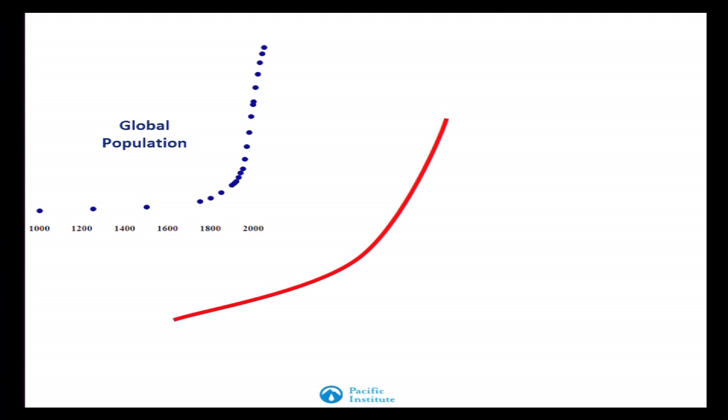Let me talk about the concept of peak water before I come back to this idea of supply. Let me do it in the context of exponential curves that all of us are familiar with. Exponential curves that you all know are frankly behind many of the problems that we face today. Global population, described by an exponential curve. This is the population curve for the last 1,000 years, from 1000 to 2000 AD, showing exponential growth in population. Carbon dioxide in the atmosphere over the last 1,000 years. We heard some talk quite a bit about climate in the first session this morning. Atmospheric concentration of CO2 in the atmosphere over the last 1,000 years.

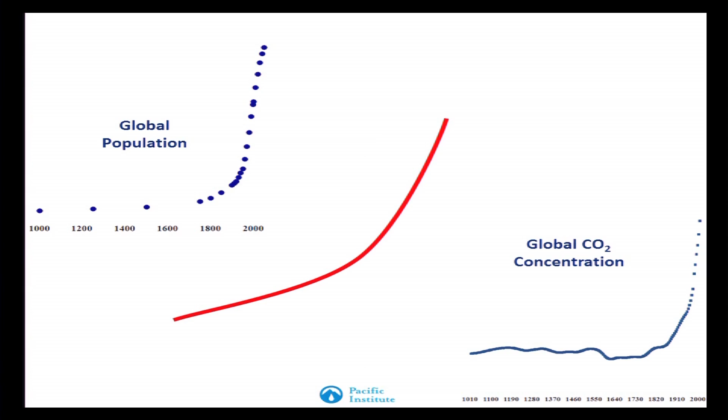Exponential growth is behind many of the problems we face today: exponential growth followed by a peak in something, followed by a decline. We saw lots of curves this morning, and you see this kind of graph in lots of the sciences you deal with.

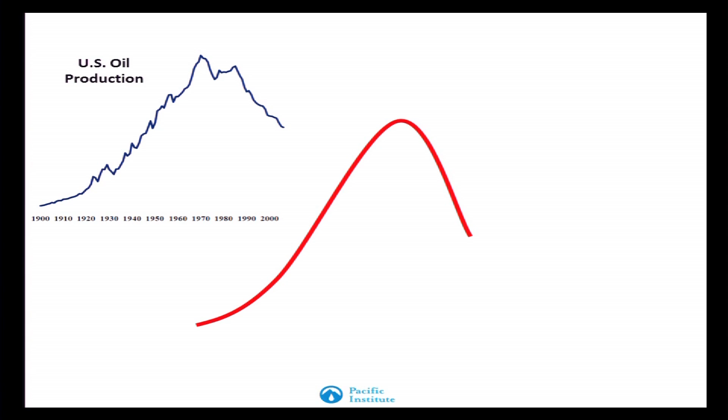We see it with US oil production, and the concept of peak oil is this curve. This is a graph of peak oil production in the United States. Oil production in the US peaked in the 1970s, I think 1970, and has declined since then. There's a debate about when the world will reach peak oil. Peak oil doesn't mean we're going to run out of oil - it means it will become more difficult to find or more expensive to produce, and alternatives will become cheaper while production declines. But exponential growth in something, a peak, and then a decline follows this classic shape.

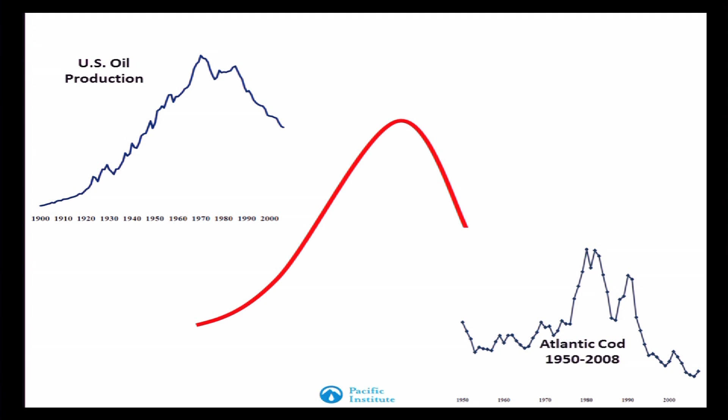Atlantic cod - again you can't read the numbers, but from 1950 to 2010, cod production shows exponential growth in the taking of cod in the Atlantic, followed by a collapse in the cod population and a decline in cod capture. Even to this day, the cod population in the Atlantic hasn't recovered. So demands on resources, peaking in resources, and a collapse or decline follows this kind of curve.

Another comment about peak water - this is in the context of some work I've done with a colleague of mine, Meena Palaniappan, on the concept of peak water.

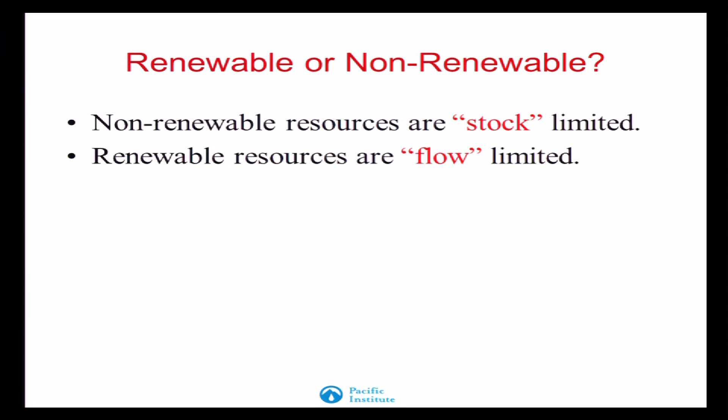Water is a renewable resource, mostly. A renewable resource is typically defined as one that is flow limited. A non-renewable resource like oil is typically defined as stock limited. The difference is that non-renewable resources are limited by the amount that's there - the stock. Once it's gone, it's gone, it's non-renewable. Renewable resources are limited by flow - the amount you use has no effect on the amount you get next year. Think about a river, natural flows, the hydrologic cycle. It doesn't matter if you take water out of the river this year, it doesn't affect how much you get next year. There's natural variability, but you can't take more than the natural flow. So renewable resources are flow limited.

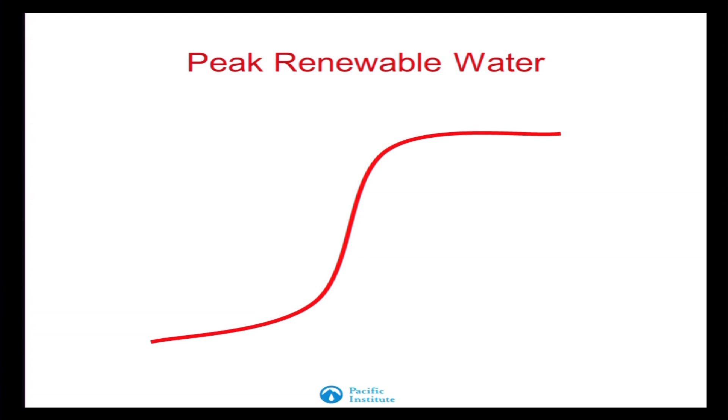Water, interestingly, is mostly renewable, but has some non-renewable characteristics, and in the concept of peak water that's relevant. Peak renewable water looks like this: you start to take water out of a river, your demand grows because demand for industrial or agricultural water use grows, and then you take it all and you can't have any more. Once you take the entire renewable flow of a river, you're constrained - that's peak renewable water.

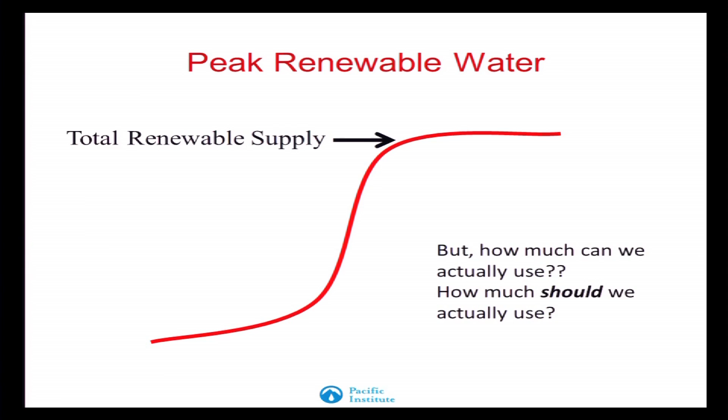We see this on the Colorado River, we see this on lots of rivers. It begs the question: should we take it all? That's an ecosystem question, a societal question, a cultural question - there are lots of issues associated with that. But that's the concept of peak renewable water. And in more and more of our resources, our traditional response to demand for supply - find more water - is running into constraints.

This is the flow of the Colorado River measured at the southern boundary station, basically at the mouth of the delta in Mexico. What it shows, first of all, is lots of natural variability - we have wet years and dry years. It also shows that in the 30s, 40s, 50s, and 60s, the amount of water reaching the delta started to decline.

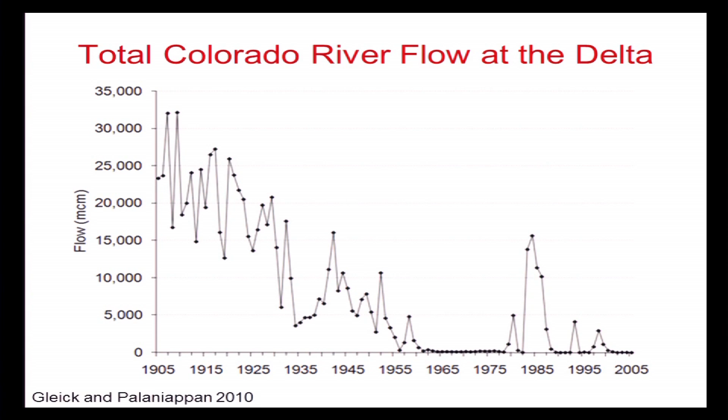And that's because we built the big reservoirs on the Colorado River and we started to take a lot of water out for our cities and our agricultural demands. And what it also shows now is that in average or typical years, no water reaches the Colorado River Delta anymore. We, the 7 states and Mexico, take it all. In really wet years, if the reservoirs are full and you get a wet year, some flow reaches the Delta. But mostly, we've reached peak demand and peak supply on the Colorado River. And this is true on the Yellow River, the Nile, and lots of ecosystems around the world.

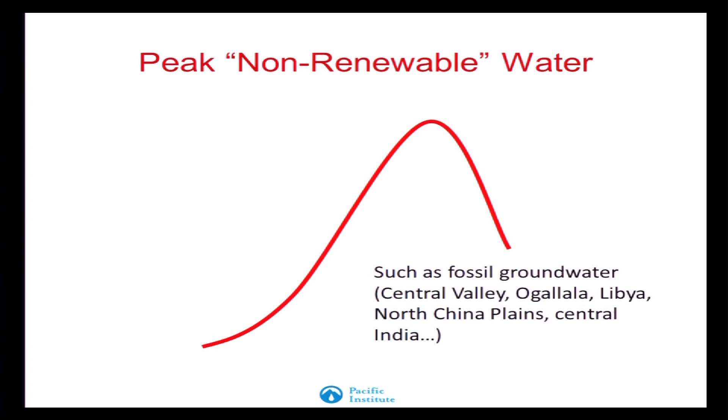Peak non-renewable water looks like this: you take water out of an aquifer, more and more, and the groundwater levels drop. It becomes more expensive to pump, and you run into a peak and start to reduce withdrawals because it's more expensive. Land goes out of production, like in the Ogallala aquifer, and you get a decline. That's peak non-renewable water. A lot of our water use worldwide now is not peak renewable water, but peak non-renewable water—that's another topic for another conversation.

Then there's the concept of peak ecological water, which I won't discuss much except to say it's the idea that we reach a point where the next gallon or cubic meter of water you withdraw causes more ecological and economic harm than benefit. Benefits grow with the amount of water appropriated by humans, until suddenly the next unit of water has negative economic or ecological value—or preferably a combination of both. We're good at measuring economic value, crappy at measuring ecological value, but that's a question for ecological economics. We argue lots of systems around the world are way past the point of peak ecological water, where we're now causing more harm than benefit from the water we take out.

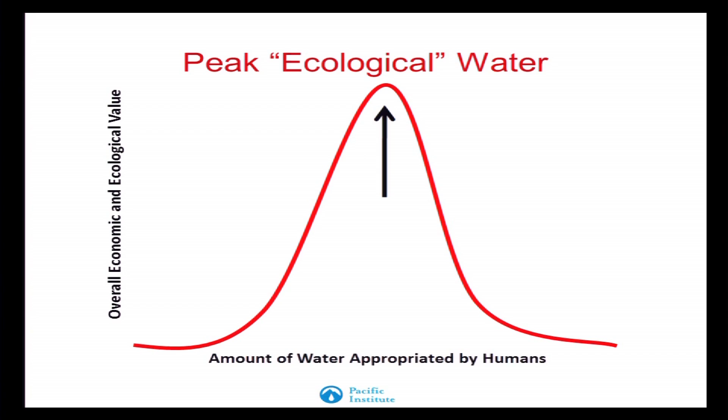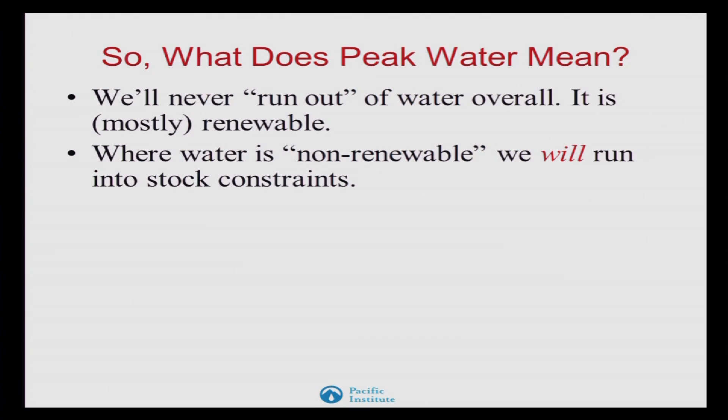So, quick overview: peak water doesn't mean we're going to run out of water. Water is mostly a renewable system. Where it's non-renewable, we're going to run into stock constraints, and there are limits on what we'll be able to do in the future. And we're running up against flow limits in renewable systems—a combination of natural flow constraints and increasingly economic, and I'd argue ecological, constraints. We're hitting peak ecological water in lots of our systems.

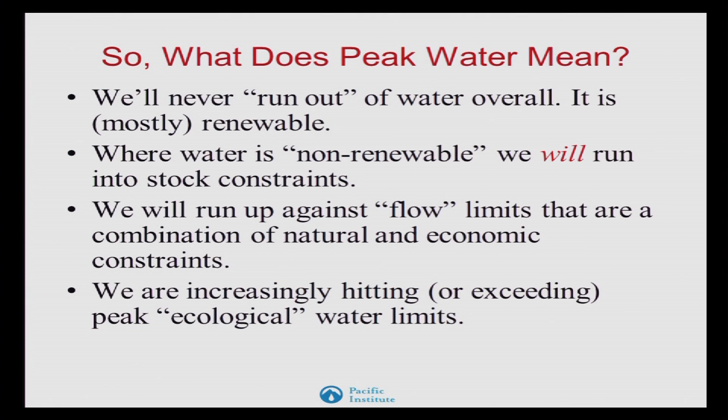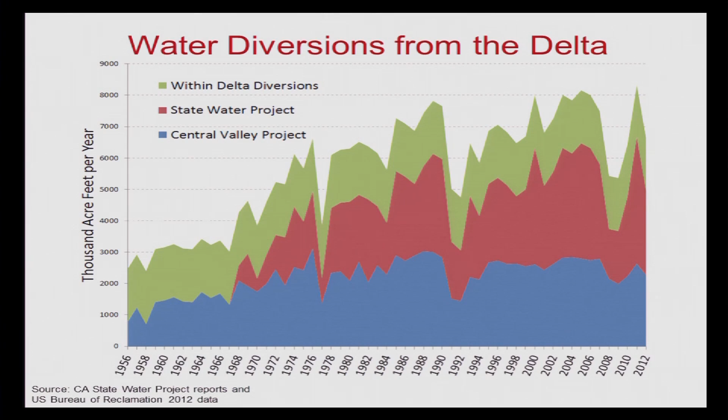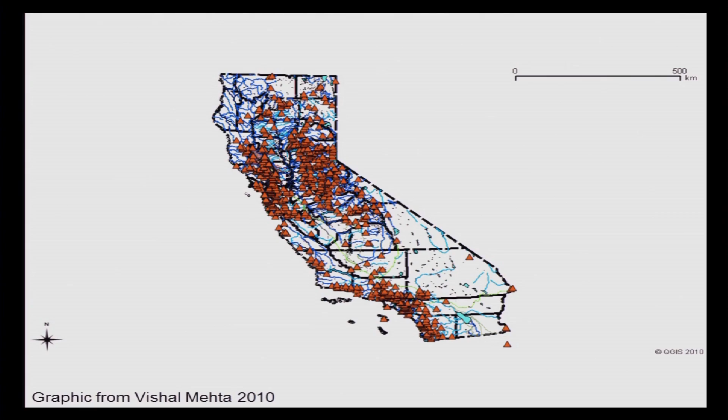These are GIS maps of dams, all the dams in California. There are thousands of them. Maybe we could squeeze in a few more on some of the rivers in between existing dams, which are some of the proposals, or off-stream dams, or raise existing dams. There are lots of proposals out there. But I'm gonna state, it's an opinion, that I don't think that would solve our water problems.

This is a blow-up of that logistics curve I showed you for the nation, for reservoir storage. This is California. Total cumulative capacity, water stored behind California dams over time. You can see we started to build big dams in the 20s, 30s, 40s, 50s. Here we built Shasta, a big increment to storage behind dams. And Trinity Dam and Exchequer and Oroville, the keystone of the state water project. This is the federal water project, and so on.

And then it sort of leveled off. Because, why? Well, we built on all the good dam sites, and some not so good dam sites, one might argue. Federal money and state money for new projects dried up. We started to realize the ecological damage, the peak ecological issues associated with building big on-stream storage. And there was growing environmental movements, David Brower among them, who raised awareness about the ecological costs, not the economic benefits, but the ecological costs of this infrastructure.

Lots of reasons. But the bottom line is that, up here I've plotted the most likely new additions to storage that have been proposed: raising Shasta a couple of feet or more, building Sites Reservoir, which is an off-stream storage in the North Delta, squeezing one more dam on the San Joaquin in between two existing dams. Those are the three new big storage options that have been proposed. I don't know if any of them will be built. If all of them are built, we get this additional increment.

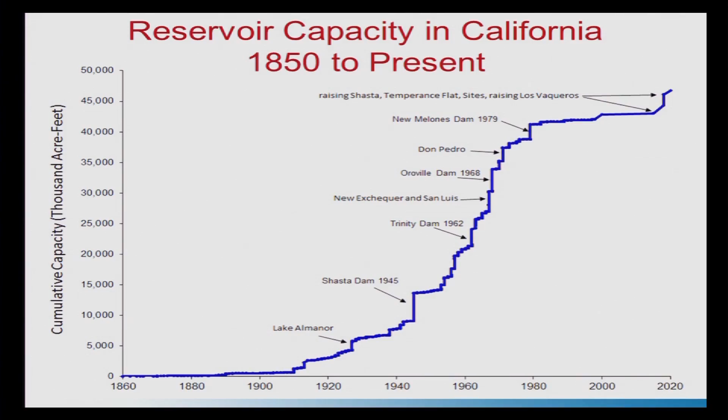And I don't think there's going to be much beyond that. We're not going to make this curve exponential again, even if we wanted to. That's not going to happen. That's one of the reasons why I think new traditional supply is not necessarily the answer.

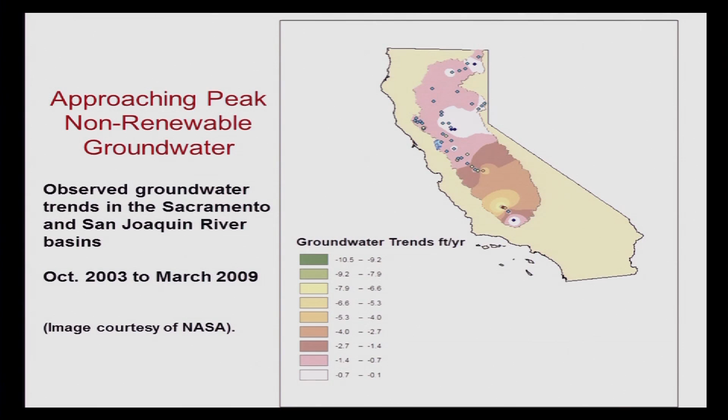We're overpumping groundwater. This is a map, a little hard to read, but basically shows those areas where non-renewable groundwater withdrawals are occurring, especially the lower San Joaquin, where we overpump statewide on average 1 million or 1.5 million acre feet of water a year. That's not sustainable. Groundwater levels are dropping, streams are drying up, ecosystems are suffering. We can do that for a little while longer, but it's unsustainable. It's got to stop. And where are we going to find another 1.5 million acre feet just to replace that overdraft? Much less are we going to expand supply with more groundwater pumping? I would argue no.

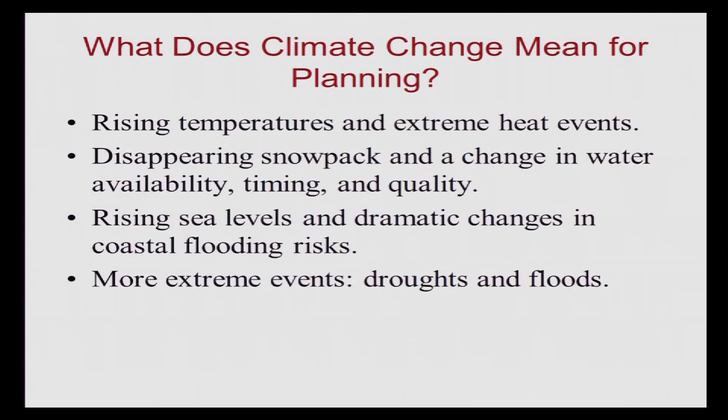Climate change, I'm not going to talk about this much. You heard a lot about it earlier, but climate change is going to screw up our existing hydrologic cycle in ways that you heard about this morning. We've done a lot of work on that at the Pacific Institute. We're not adequately planning for those changes in the hydrologic cycle that we're now confident will occur, especially changes in the timing of snowfall and snowmelt runoff on our rivers. So if traditional supply isn't going to work, what do we do?

This is solutions. I think there are other things that we can do. First of all, I'm not saying new supply isn't a good idea. I'm saying traditional supply isn't going to solve our problem. But there are lots of new ways of thinking about supply. Conjunctive use: recharge some of those groundwater aquifers, treat them like reservoirs, fill them up in wet years. You don't lose water to evaporation, and pump them more in dry years. That's conjunctive use, and there are interesting experiments going on already in California in that area.

Treated wastewater: there's probably 1 million acre feet of treated wastewater, treated to different standards, that we collect, treat, and throw away. That's a new source of supply. It's an asset, not a liability. Innovative water transfers among different users, desalination when we can deal adequately with the environmental and economic challenges of desalination, is a potential source of new supply for certain areas. Rainwater harvesting - there are lots of new things we can do that don't require building new dams and aqueducts and overpumping groundwater and so on. So supply, but not traditional supply.

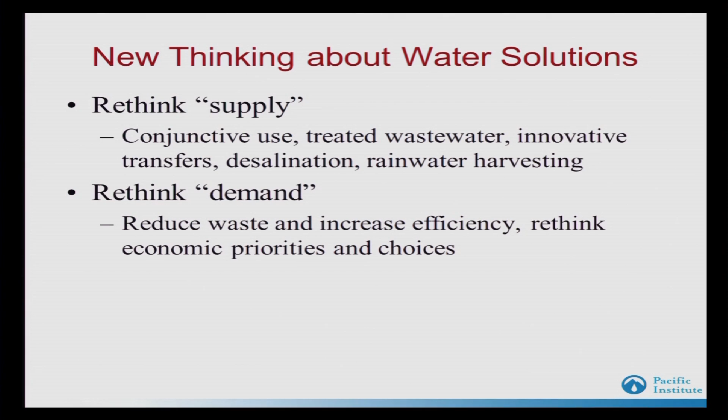That's a question of productivity, conservation, efficiency, and so on.

Dick, how am I doing on time? Doing all right. We should wrap up pretty quick, though, to leave time for the other two speakers and questions.

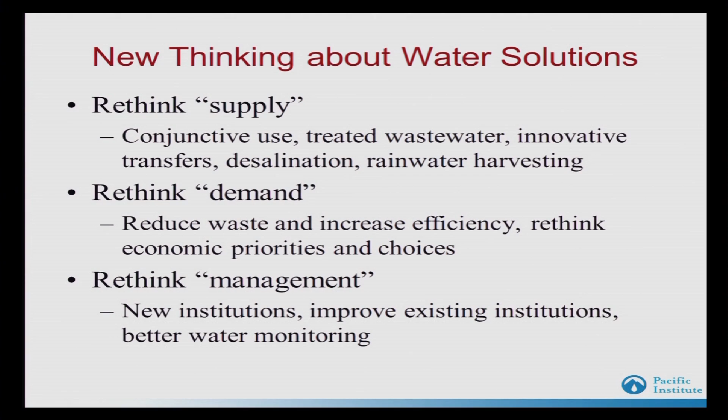We have to rethink management. Our traditional 20th century systems are not going to work for a 21st century California. And there are lots of options there, which perhaps we can talk about later.

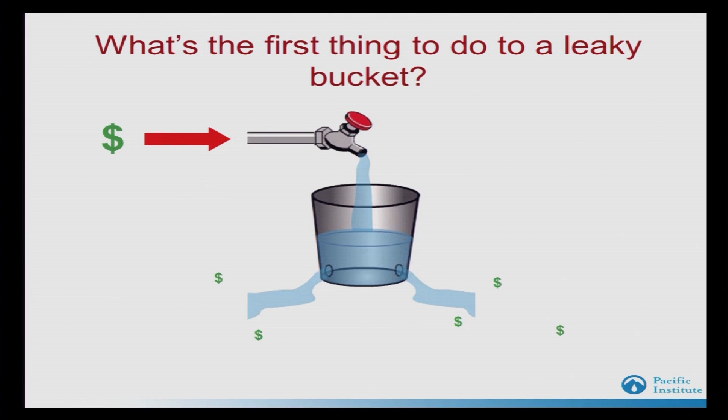But a couple of quick comments. I've talked about new sources of supply. I want to leave you with some thoughts about demand. This is related to supply, but when you have a leaky bucket and the stuff you're putting in at the top is scarce and expensive, increasingly expensive, I would argue the first thing you do is plug the leaks.

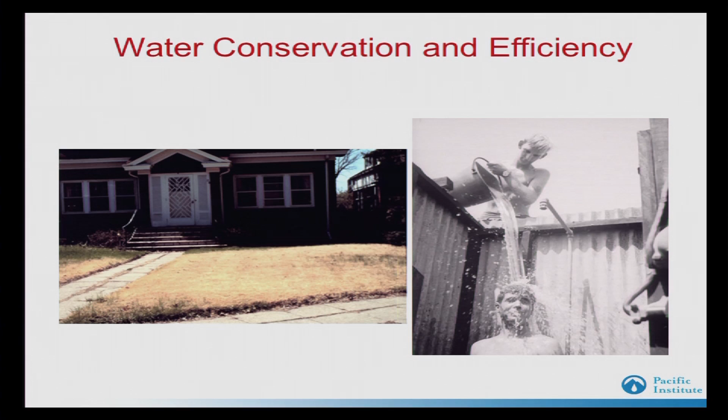And that's the argument for efficiency and conservation. It's not brown lawns and shorter showers. We do those things in an emergency. Mayor Villaraigosa talked about the restrictions on outdoor landscape watering. Okay, we do those things in an emergency.

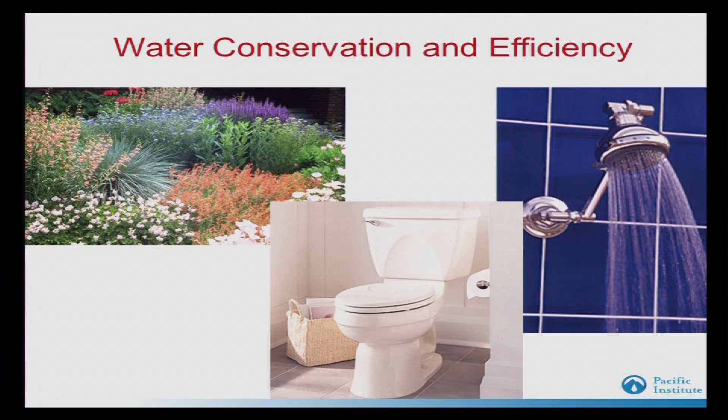But what we're talking about is not lawns, but efficient landscapes, native landscapes. We're talking about efficient appliances and toilets and shower heads and washing machines that do the things we want to do with less water. That's productivity, not deprivation.

In 1980, 100% of the toilets in California were 6-gallon per flush toilets, because that's the technology we had. Then California passed, before the national government passed, efficiency standards, and we started implementing 3.5-gallon per flush toilets, and then 1.6-gallon per flush toilets, ULFTs.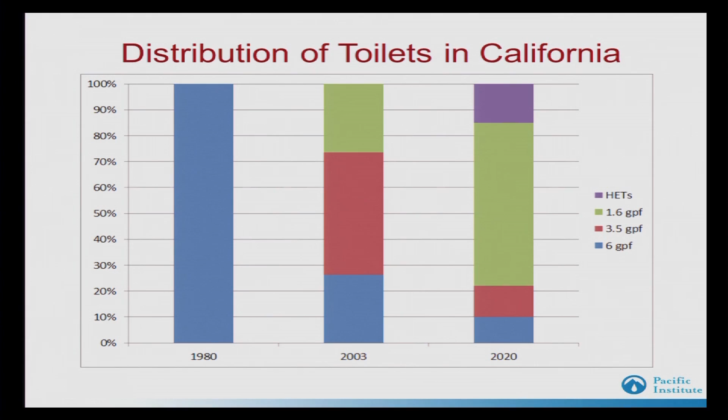So technology changes, penetration rates change, and so on. There's enormous potential for tapping into wasteful uses of water.

All right, so let me give you some final thoughts. Our assumption that the past is a good guide to the future is no longer valid. The 21st century is not going to look like the 20th century. Climate change, population dynamics, the economic systems we have in place, and sources of financing—the past isn't a perfect guide to the future.

Traditional supply options are extraordinarily limited now, here and increasingly around the world, and are not going to solve our problems. There are strategies, though, for reducing our vulnerability to peak water limits and to climate change, and they include innovative sources of supply and a focus on demand and new management techniques and strategies.

But we're going to have to think differently, and we're not thinking differently. Water policy in the state of California, even today, is mired in the old thinking. The new California water plan that was just released this week takes steps in the right direction, but in my opinion, they're too slow. We're going to have to do things differently and more quickly if we're going to prevent the problems that I think we see are coming. Thank you very much.

All right, thank you, Peter. Our next speaker is David Sedlak, who's the co-director of the Berkeley Water Center and a professor in the Department of Civil and Environmental Engineering here at Berkeley. He's a Malozemoff professor in mineral engineering, and his research interests relate to the fate of wastewater-derived contaminants, particularly those found in pharmaceuticals and consumer products of all sorts. His specialty is understanding the fate of those chemicals as we think about groundwater recharge and water reuse. Dave will continue the discussion, a little bit of history, but also looking at some of the solutions in place today that can serve as a roadmap to the future.

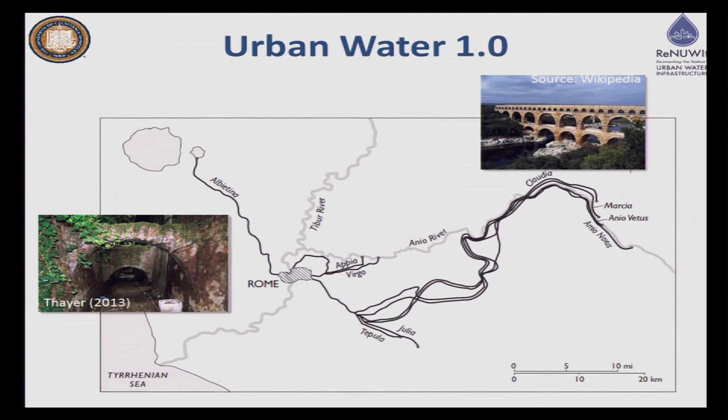Along with that revolution in water, there was a revolution in the idea of sewers. Open pits became the cloaca of Rome, which got covered over, and sewers were invented. That idea of imported water, distribution to household levels, and disposal in sewers became the first generation of urban water infrastructure. When cities started to grow in the second half of the 19th century, and people started moving to the United States building big cities, they built upon the Roman experience and replicated it.

Here you see a map showing New York City's gravity-fed urban water system, where water taken from the Catskills and the Croton watershed delivers water to New York City, and sewers, much like the sewers of ancient Rome, initially discharged the waste to New York Harbor. As Peter showed you with the Colorado River, the delta down in Mexico where it discharges—the reason that water doesn't necessarily reach all the way down into Mexico is a lot of it's being used for agriculture up here and also to supply water to Southern California. So again, using this idea of imported water as the first revolution.

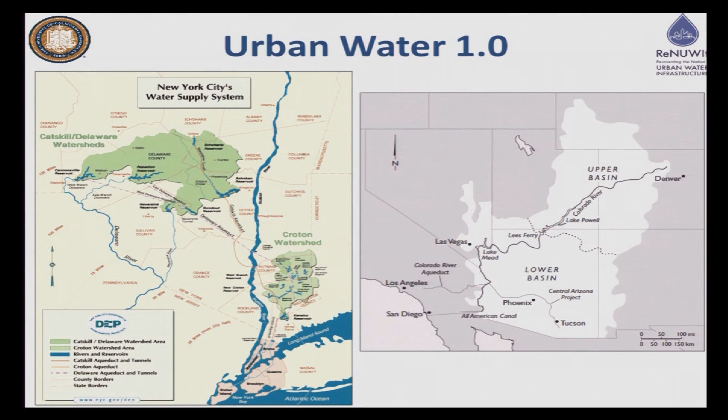The second revolution in urban water happened when people realized that those sewers discharging water after it was used were becoming the drinking water supply of the downstream community. The best example is the cities of Lowell and Lawrence on the Merrimack River in Massachusetts. These were mill towns, among the largest cities in America in their day, and they disposed their sewage in the old-fashioned way—they put it into the river. Unfortunately for Lawrence, they were downstream of Lowell.

In the 1890s, typhoid fever outbreaks were commonplace, and Lawrence lacked the ability to find an alternative source of water. So out of necessity, they started doing serious research in how to solve their water problem and allow them to still consume water that came out of the Merrimack River.

Instrumental to solving those problems was the work of the scientists at MIT's Lawrence Experimental Station. William Sedgwick was the sanitary detective who found the sources and tried to stop the worst of them coming into the Merrimack. Allen Hazen, a child prodigy who graduated from Dartmouth at around age 19, pioneered a lot of the early work in slow sand filters and sand filtration to prevent typhoid fever. The combination of sand filtration and chlorine disinfection made it possible to drink effluent-impacted waters.

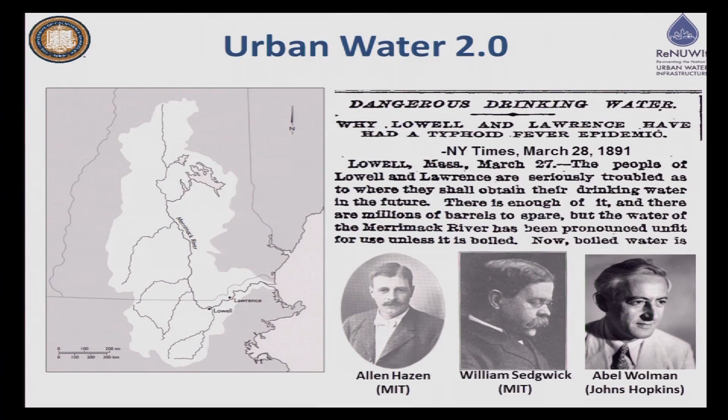In the 20th century, people like Abel Wolman from Johns Hopkins helped transfer this idea all around the world. So the second revolution in urban water, spurred on by university research, made it possible to live in denser and denser cities and for people to consume water that had been contaminated by an upstream wastewater discharge.

The third revolution in urban water infrastructure was the construction of sewage treatment plants. Sewage treatment plants were not built to protect the public health of downstream communities. They were built to prevent things like oxygen depletion in waters downstream of sewage discharges and ecological impacts from the organic matter, the nutrients, and everything else that went with the sewage discharge.

The development of sewage treatment can be traced down to the research of Gilbert Fowler, a professor at the University of Manchester, who helped pioneer the idea of activated sludge treatment after visiting the Lawrence Experimental Station and seeing the work on slow sand filters.

Here in California, the idea of sewage treatment was pioneered largely here at UC Berkeley. I looked for a picture of Professor Charles Gilman Hyde. I couldn't find one on the web, but I found a picture of the civil engineering building that preceded Davis Hall, and I sure wish we had it back. Any of you ever been in Davis Hall? It's a very beautiful building. But Gilman Hyde and his colleagues at Berkeley really did a lot to bring sewage treatment to California.

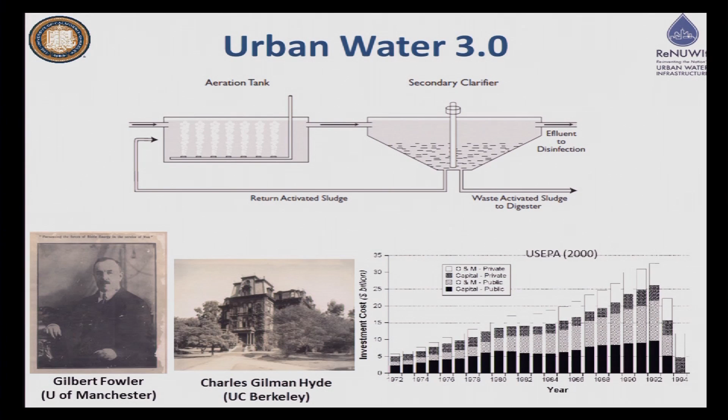You can see here in this figure from the EPA, after the Clean Water Act in the 1970s, that revolution designed by people like Fowler and Gilman Hyde and many others at the university spread around the world. So when the Cuyahoga River caught on fire, when people started turning their attention to the environment, the answer was there because university researchers had developed the wherewithal to treat sewage.

So here we are on the dawn of the fourth revolution in urban water supply. We heard Mayor Villaraigosa tell us this morning about Los Angeles' plan for delivering water. We heard some talks from Bill and Chris earlier this morning about what our different climate is going to look like, even if we get our act together and stop releasing as much carbon dioxide as we are. We bought into a certain amount of climate change.

It's going to mean major investments in urban water infrastructure here in California. And Peter was just telling us we're not going to do it the way we did it in the 20th century. We're going to have to find new ways.

Many of these things are locked in. These changes in plumbing codes, these improvements in irrigation efficiencies, those are locked in and they're going to grow and become an important part of how we solve the problem. But they're not going to be the only part of our solution.

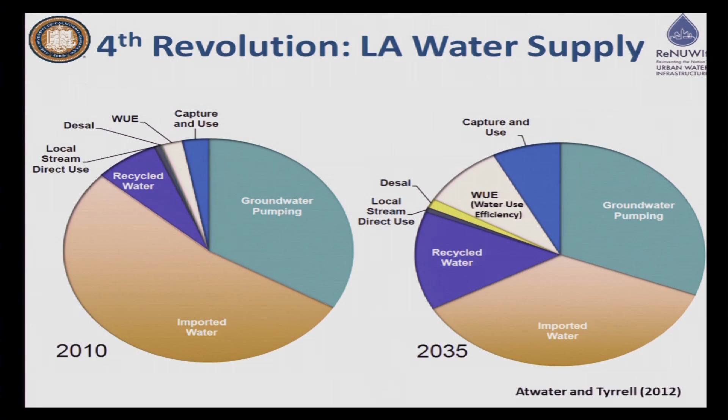The two I want to talk to you about today are recycled water, which you see here is going to more than double, and capture and use. What we're capturing and using in that case is urban stormwater runoff. So this is the stuff that flows down the middle of the street and goes into the storm drains and flows out to the ocean now. That's going to be our water supply in the future.

And this is what Los Angeles' objective is. You can see the tiny yellow slice there, seawater desalination. It may grow a little bit, but it's not planned to grow to the extent of the other two. You can ask a question about that later and hear a very opinionated answer from both Peter and myself.

Okay. Ask the question, Braden, and you'll find out.

I also wanted to tell you about some things that aren't captured in that graph, and that's the fact that we're already doing a fair amount of water reuse that goes under the category as groundwater use. So this is the Santa Ana River Basin in Southern California.

For those of you who've never been down south, this is Disneyland here. So if you go visit Disneyland here in Anaheim, you'll see the Santa Ana River. And the Santa Ana River is a very interesting place to manage for urban water issues because they only rely on a relatively small amount of imported water.

Most of the water comes from the watershed. One of the challenges for the Santa Ana River watershed is the Inland Empire area, Riverside and San Bernardino, which has grown quite a bit in the last 30 years. Around 1970, it was around 1 million people. It's approaching 4 million people now.

Through the growth of those people and the discharge of their sewage, the Santa Ana River has transitioned from what was more or less a conventional California river with ephemeral flow draining the mountain snowmelt to being a wastewater effluent-dominated river during much of the year. And that's interesting because that wastewater effluent-dominated river is the drinking water supply of Anaheim and lots of other places downstream.

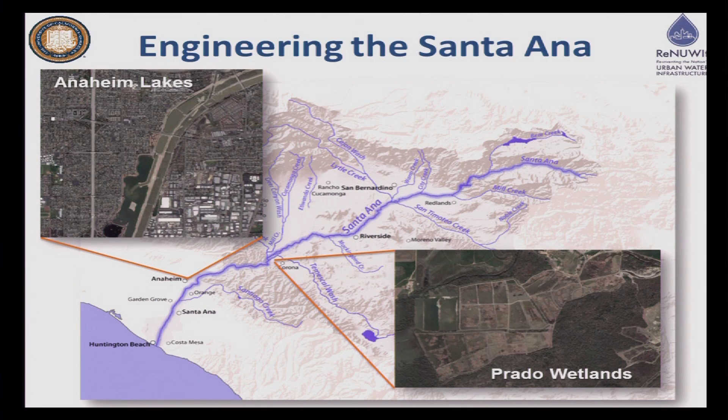But the one that's more important and interesting to me are the Prado wetlands. These are wetlands that built up behind the Prado Dam when it was built as a flood control structure. As the nitrate levels in the Santa Ana River increased, the Orange County Water District, working with Professor Alex Horne here at UC Berkeley, engineered that system with constructed wetlands to remove nitrate, because wetlands are really good at denitrification. They use that to knock down the nitrate concentrations to a level that would make it safe to drink.

Now we've been interested in removing some other kinds of chemicals - pharmaceuticals and personal care products, chlorine disinfection byproducts and other chemicals. So we've been working with the town of Discovery Bay up near the Delta, building a new kind of treatment wetland. It's a shallow open water wetland - there's a poster outside that talks a little about this wetland system. This wetland is able to remove nitrate like the existing system, but it's also very good at removing trace organic contaminants like pharmaceuticals, steroid hormones, and disinfection byproducts.

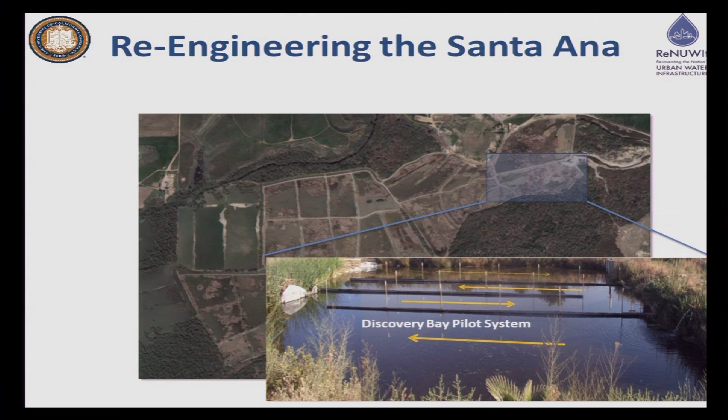And we convinced the Orange County Water District, because we have a long-standing partnership with them, to actually build this out in the Prado wetlands. So that little cell here, I'll show you in a blow-up - that's what it looks like earlier this summer. The water is about to go in there any week now. I think they're just getting some final touches ready.

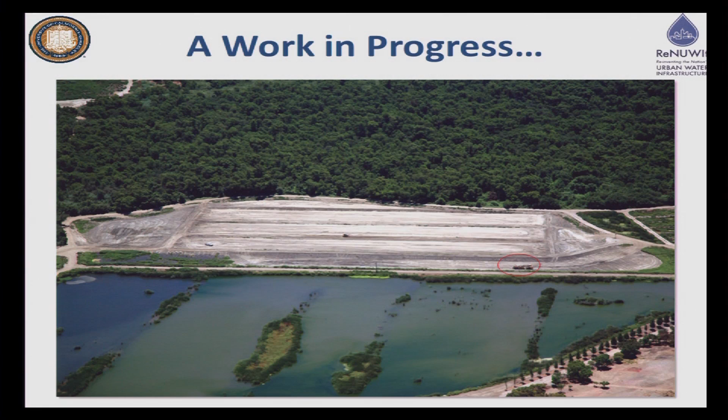In the Santa Ana River, the other interesting place, and the one that people most think about when they think about Orange County Water District and the Santa Ana River, is the facility called Water Factory 21, which was a seawater intrusion barrier.

What happened here was that in the '50s, the groundwater wells here in Orange County were overpumped, and the seawater started moving inland, obeying the laws of physics and moving downhill. The water became saltier and saltier. To prevent that salty water from getting into the drinking water wells, the Orange County Water District said we have to inject fresh water to push it back to the sea.

Initially they thought they would do it by desalinating seawater, but that turned out to be too expensive. So instead, they desalinated wastewater effluent. Starting in the 1970s, wastewater effluent from the Orange County Sanitation District's treatment plant was treated by reverse osmosis and activated carbon and injected into this line of wells here to push the intruding salt water back.

I got involved in research with them in the mid-1990s when they were considering tripling the size of this system and extending this recycled water project upstream, when they discovered a contaminant, NDMA, N-nitrosodimethylamine. This is a potent carcinogen, and when the state looked at the health data, they said any concentration above about 10 nanograms per liter, or parts per trillion, would be unacceptable to human health.

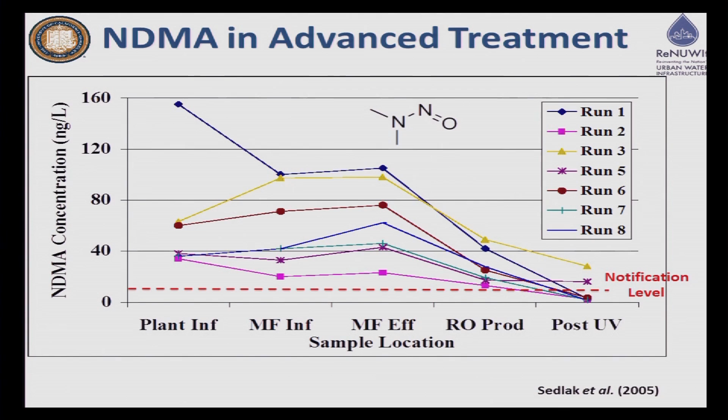Then it's destroyed by UV light, which made it safe. So the Orange County Water District went along with plans to triple the size of Water Factory 21 and rename it the Groundwater Replenishment System, admitting that this was a system for replenishing drinking water, not just keeping seawater at bay. This is what it looks like today—they pump water up to those Anaheim lakes I showed earlier, inject it, and that becomes the potable water supply.

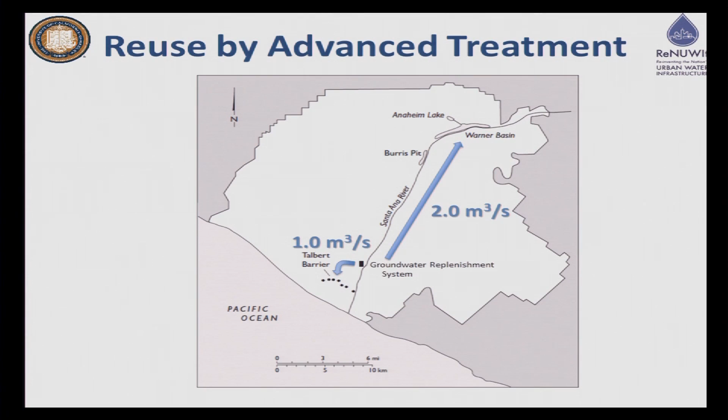We still work with the Orange County Water District because they're on the forefront of this revolution in urban water supply. We're asking what happens when you drink water that used to be wastewater effluent—toilet to tap, let's admit it—that came out of a treatment plant, went through reverse osmosis, went through UV peroxide. One project we started initially in Singapore at the Public Utilities Board, and continued with Orange County Water District, has been to identify contaminants in sewage that can make it through the reverse osmosis system into the finished tap water.

The ones that turned out to be particularly risky from the perspective of public acceptance of the water were taste and odor compounds. Chemicals like pyrrolidone, trichloroanisole, and hydroxyvanillin have a very low odor and taste threshold. People can smell and taste them in their water, and if they have a new water supply that tastes funny, they're going to reject it.

This was really hard work. Here's my student, Eva Agus, using the best detector for odorous compounds: the human nose. You use gas chromatography and sniff with your nose to find these compounds, then use mass spectrometry to identify them. We found which compounds give the smell to the wastewater, and found ways to destroy them.

So now we have ways to actually do this kind of toilet-to-tap project and create water that's not only safe with respect to public health, but also doesn't taste funny.

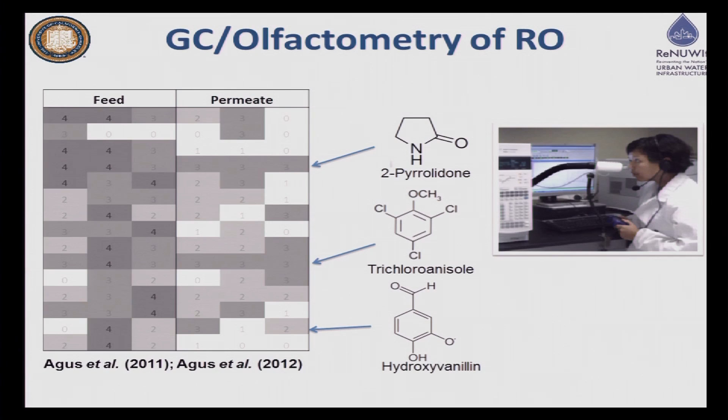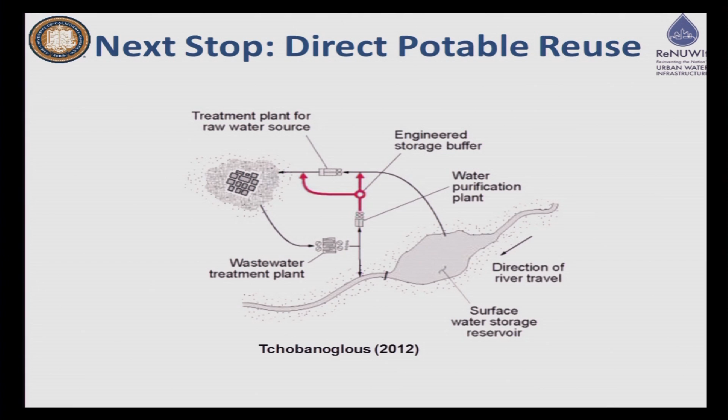And that's good, because the train that's left the station in Southern California for so-called indirect potable reuse is moving to the idea of direct potable reuse. There's a lot of discussion now among utilities in Southern California of no longer putting wastewater effluent into an aquifer, but piping it directly into the inlet of a drinking water treatment plant. There are a lot of economic reasons, and a lot of logistical reasons, that utilities without a wonderful sandy aquifer like Orange County are pursuing this approach. We could talk about those during the question session.

Finally, I want to touch on urban runoff as a water supply. This stuff that runs down the streets—you look at it and think, would I really want to stick my cup in there and drink this drainage water? Well, that's actually a great water resource because it doesn't have a lot of salt in it, and it causes problems like beach closures and damage to streams.

So the Los Angeles Department of Water and Power has an ambitious plan to increase the amount of rainwater they capture and infiltrate into the ground. But unlike Seattle or Philadelphia or other places with many small storms distributed over the entire year, in Southern California, when it rains, it pours. So you have to capture that rainwater, hold it somewhere, and then inject it into the ground.

This project, the Rory M. Shaw Wetland Park in Burbank, California, is funded by LA Department of Water and Power, with construction slated to start in 2015. It's a former rock quarry that's been dug out, and it's going to capture the rainwater that normally goes into the storm sewers, then feed it through this above-ground wetland system.

And underneath this ball field is a percolation basin where that stormwater is going to percolate back into the drinking water aquifer. And when I saw this, I said, that's a really cool idea, but I'm not sure I want to drink the runoff coming off the streets just after it's been through a wetland and percolated through some rocks. And then I went on a field trip to see this place.

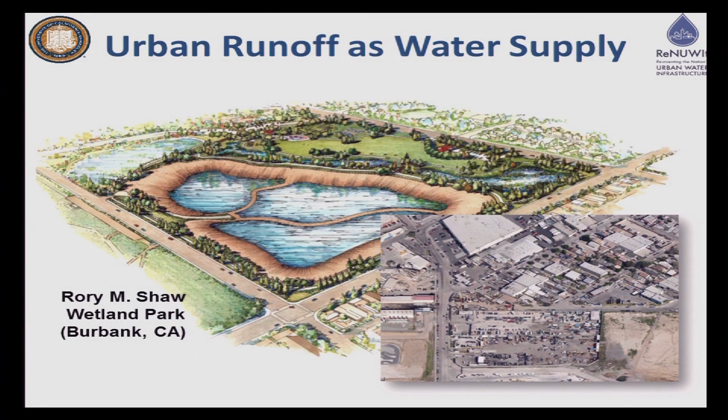This is what it looks like in the part of the picture you can see - auto repair lots, industrial facilities, and all kinds of things that you would expect could contaminate groundwater and surface water.

So we've been working on research trying to identify what kinds of contaminants you might worry about - things like herbicides, things that come off of tires of cars, things like this one here. If you put that flea medication on your dog's back, I should ask Bill Collins if he uses this on his dogs. It's got this crazy molecule with carbon-fluorine bonds, and it can be detected in urban runoff. So we wonder about these things making it into the water supply.

Rather than just throwing up our hands and giving up on this potentially useful water supply, we're starting research on ways to destroy these contaminants. Rather than just percolating this stuff through the soil, we're looking at engineered geomedia - rather than just using sand, using things like activated carbon and biochar to absorb contaminants, and iron oxides and manganese oxides to chemically degrade these contaminants. Hopefully, coupled with the wetland system, we can find a passive treatment system to purify this water as it undergoes the recharge process.

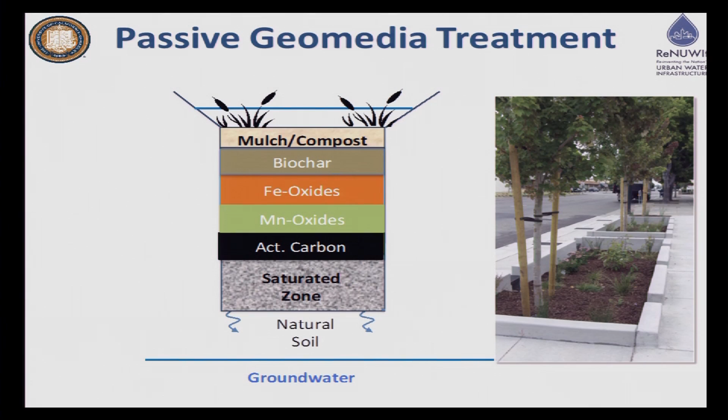So some final thoughts about this fourth generation of urban water systems. What is Water 4.1 going to look like? If this is the way we're getting to 2025 or 2035, how are we getting to 2050 and 2080 under these new climate scenarios? Inevitably, there's going to be more potable reuse, like what you saw in Orange County, more stormwater harvesting, like what we're starting to see in Southern California, and certainly more water use efficiency, in ways we probably can't even anticipate based on what's on the market now.

But I think there are other things we're going to see and other research opportunities. For example, there are a number of aquifers in Southern California that are too polluted to drink from because they're near former hazardous waste sites. I think if we can treat those, we have a great source of water. There are off-the-grid housing developments that people have proposed and explored in Europe. It's possible to do much better work on water use efficiency by recycling water within the home - gray water, roof water, you name it. There are all these options out there that are still too expensive because the technological research hasn't been done yet.

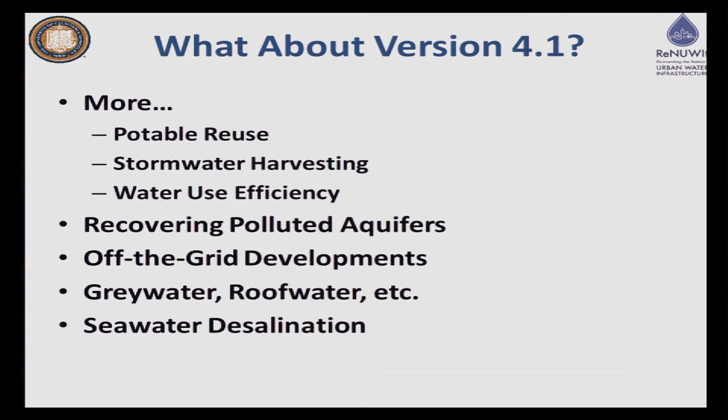And then finally, at the bottom of the list is seawater desalination. It's certainly the way Australia went in response to their major decade-long drought. It's the way Israel's going. It's the way Spain is going. I think if we can figure out how to do seawater desalination well, it will be another part of California's water portfolio. So with that, I just want to end with some acknowledgments.

I can't read out the names of everyone here, but I wanted to emphasize that the work done in ReNUWIt is a collaboration between Berkeley, Stanford, Colorado School of Mines, and the Swiss Federal Institute in Zurich. And also here at Berkeley, it's not just engineers who do this - it's people in the College of Environmental Design, like Bill Eisenstein and Louise Mozingo, and Michael Kiparsky in the Wheeler Institute for Water Law. So I realize this is an interdisciplinary project. I talk mostly about the technological part today, but there's a broader social science and institutional side. And lastly, I want to acknowledge the funding agencies and the utilities that have helped us.

And if you want to learn more about the fourth generation of urban water, a book that I wrote is coming out in January, and you can find the website there. So thank you very much.

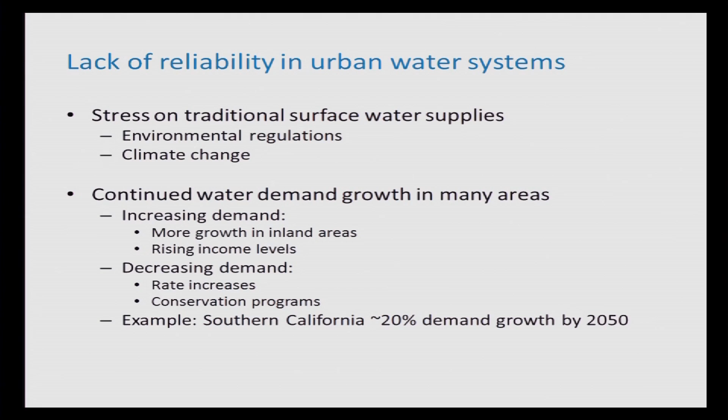Second, and here, I think there's room for some technical debate, but focusing attention, like I'm going to do in the talk, mostly on Southern California, our work projects that there actually will be some continued demand growth. Not at anything like the rates that we experienced in the 60s and 70s when the state was growing so much, but there will be some modest increase in water demand growth out to 2050. There are factors that work in both directions. I would argue that on balance, there's a slight positive tilt to this whole thing. On the increasing demand side of the ledger, there's projected to be more people. Southern California, Northern California, it's a popular state. The growth is projected to occur primarily in inland areas and not in the coastal areas that are already largely built out. That has important implications for water demand in a couple of ways. First of all, inland areas are hotter.

That leads to more water demand. Inland areas also have lower land prices, so people tend to have more outdoor irrigation. They have larger lot sizes, more outdoor irrigation. So the fact that growth occurs inland as opposed to in coastal areas tends to increase water demand.

Income levels are also projected to increase. One absolute empirical regularity that's been established in hundreds of papers is that as income goes up, people purchase more water. So as income is projected to increase, that has an increasing effect on water demand in California.

But there are factors that argue for a decrease in demand. Rates are going up. Water's a commodity just like many other things we purchase in a marketplace. As the price of it goes up, people use less of it. So that's one factor that definitely will increase... decrease demand going forward.

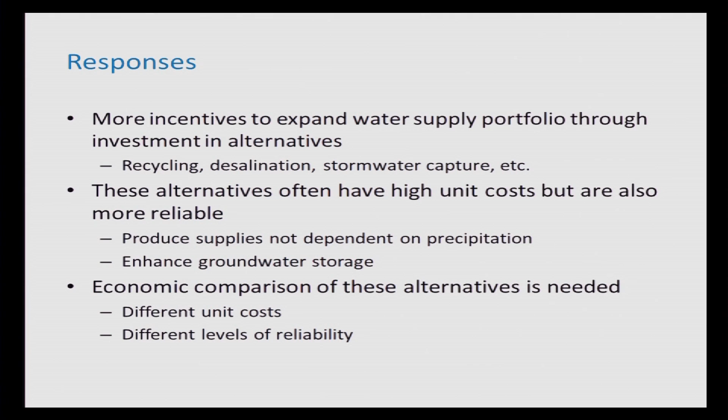But the alternative water supply might also have a different reliability profile. Desalination is not really subject to fluctuations in precipitation. It's going to be there every year, and that's valuable. Recycling is also valuable for the same reasons. Anything that enhances groundwater storage is valuable for the same reason. It all improves reliability. So to do a full and accurate comparison of the costs of a traditional supply source, like taking water out of the delta, to an investment in an alternative water supply, there has to be a comparison made that includes the value of reliability. So that's what I want to talk about here. And when you include the value of reliability, these things become much closer than they might otherwise appear.

So just to give you an example, if you go back to the Orange County area that David Sedlak was talking about, I do a lot of work with the Municipal Water District of Orange County, which is affiliated with Orange County Water District, but MWDOC, the Municipal Water District, they're in charge of the imported water supplies coming from the Delta and the Colorado into Orange County. The cost of water on that system, the untreated Tier 1 base rate that has to be paid currently is $593 an acre foot. If it's treated, it goes up to $847. And the Tier 2 rate, which is sort of on demand with no long-term commitment, is much more expensive, in the range of $743 to right around $1,000 an acre foot. So that's what imported water costs if you're, say, Orange County Water District ultimately.

But neither of these supplies is totally reliable. We're going to get to the reliability in a second, but suppose I were Orange County or Ventura or San Diego and I wanted to look at an alternative water supply. What would that cost?

Well, these numbers are much higher. And these numbers are higher than you might have seen before because people sometimes forget that past investments in water supply alternatives have been heavily subsidized through a whole variety of state programs, primarily. But if you take the subsidies out and look at the actual cost, this is what emerges. As an economist who works in planning a lot, that's appropriate to do because there's no guarantee that these subsidy programs are going to continue into the future. And furthermore, when something's subsidized, that means somebody else has to pay for part of it. If we're looking at welfare from a statewide point of view, you wouldn't want to include that anyway.

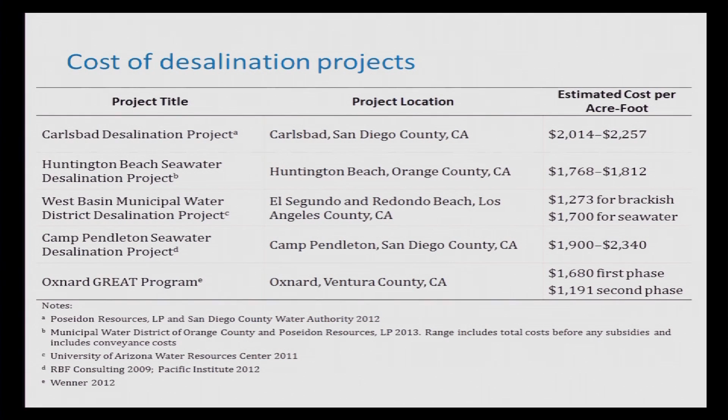Ocean desalination—let's make a distinction between ocean desalination and brackish groundwater desalination. Probably the best data point for ocean desalination is the recent project in northern San Diego County, the Carlsbad project. No one knows exactly how that's going to come out, but the projected costs are between $2,000 and $2,300 an acre foot. Peter says it's higher—it could very well be, yeah. The brackish water desalination is cheaper for a whole number of reasons, more down in the range of $1,200 to $1,700, but you get the basic point. Actual costs for a particular project are all over the place depending on how much pipe has to be laid, what the characteristics of the system are, what the characteristics of the source water are, all sorts of things. But these numbers are quite a bit higher than the cost of imported water.

So if we were going to do an actual side-by-side comparison of costs, this is part of the story, but there's more to it than that. I'm not going to get into questions of quality or environmental benefits here, though that's obviously a very important part. I do want to talk about reliability, because what I see a lot from urban water managers in California is that they're focused on not being able to meet levels of demand in every year, and that's an important part of their planning.

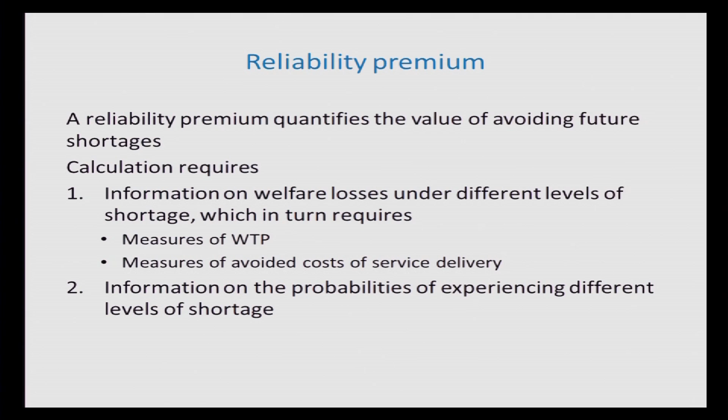But to calculate this reliability premium, you need to know some information. You need to know something about that demand curve, how steeply it slopes for different sectors. You need to know the marginal cost of service. You need to know the magnitude and the probabilities of potential future outages. And so I'm not going to go through...

Yeah, he's right. I would also lose my license if I didn't have something like that, because we're all about econometrics these days. But let me just show you some numbers that I think will indicate how important reliability is.

As a thought exercise, across all the water utilities in the Metropolitan Water District service area in Southern California—a lot of people, I think 17 or 18 million—we looked at what would be the cost of a hypothetical mandatory 10%, 20%, and 30% outage across that whole area, for just a 1-year outage at these percentages. Here are the numbers you get.

Ratepayers would be willing to pay something like $235 million to avoid a 10% outage of 1 year in duration. If you increase that to 30%, which we've really never seen in California but might see in the future, that number grows to like $1.6 billion. That's for 1 year in just one part of California. So clearly this is consequential.

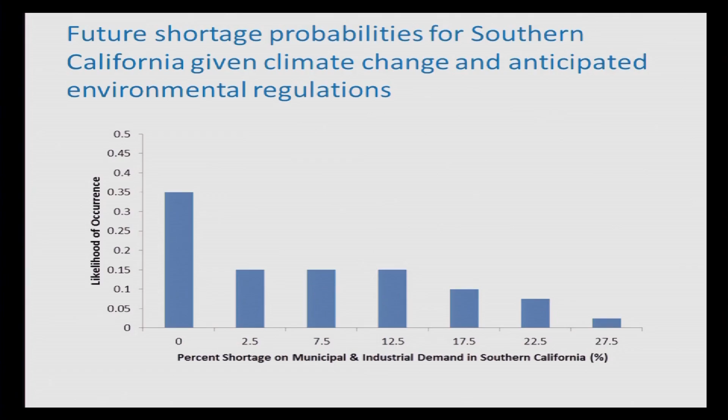Not the case anymore. You can see here, even for a shortage of something like 12.5%, which would be very, very large in historical terms—there have certainly been episodes of mandatory conservation where that was required, but they're uncommon, and this would be a big magnitude—that has something like a 15% chance of occurring in any given year, right? So this is a very high, I would argue unacceptably high, degree of unreliability unless something gets done.

So if we calculate an implicit reliability premium for the year 2020, our thought exercise shows that coming out at between $200 and $400 per acre foot, down at the level of an individual utility, looking at variations in demand. For the year 2035, that number goes to 500 to 1,000.

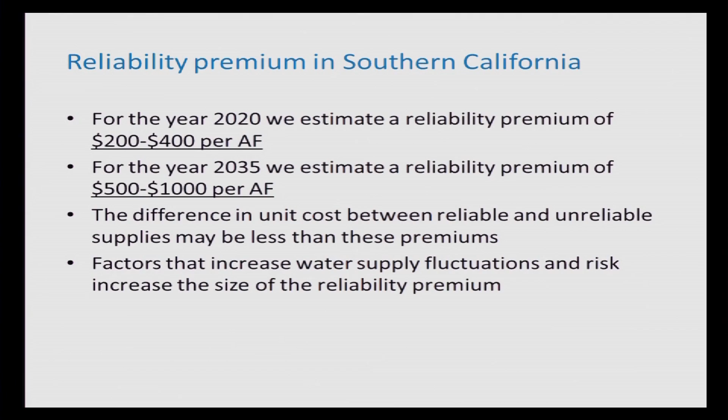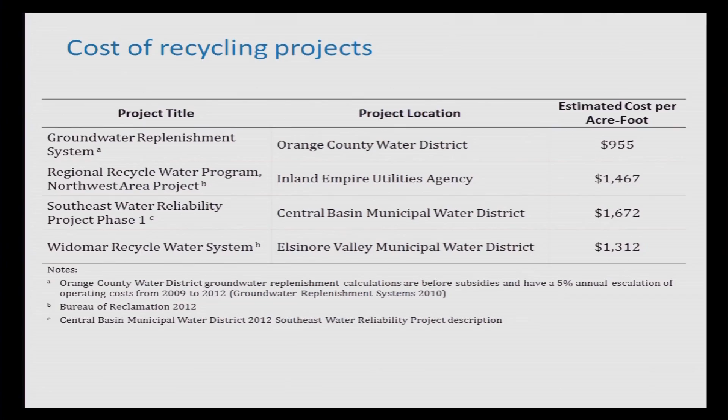Well, now these get to be really interesting magnitudes. Go back and compare these numbers to these numbers. And if you add—you can do it one of two ways, subtract the reliability premium from the cost of the alternatives, or add it to the cost of the traditional supplies—if you add $500 to $1,000 to these numbers and compare, now it's a much closer call. So if you put them on an equal footing in terms of relative degrees of reliability, if you're a water manager, these alternative investments make a lot more sense.

So again, reliability is not the only answer, but it's something that I think is increasingly important and that water managers are conscious of. So to end with

a comment that David made: here at a public university like Berkeley, we view this kind of outreach work as fundamental to what we do. Certainly UC Berkeley researchers have made important contributions, not just in California, but beyond. But we view this as being sort of fundamental to our jobs. I work with a lot of the same agencies David does, probably a lot of the same agencies that Peter works with. But this way of thinking about the economics of adoption of different kinds of water supply alternatives, I think is getting traction. We'll see where it all leads, but it is at a minimum very interesting. All right, thank you.

Now, this is a question for Dave Sedlak, and it has to do with pharmaceutical compounds and pollution prevention. How can we—what would be the role of utilities in keeping pharmaceuticals from getting into the water supply?